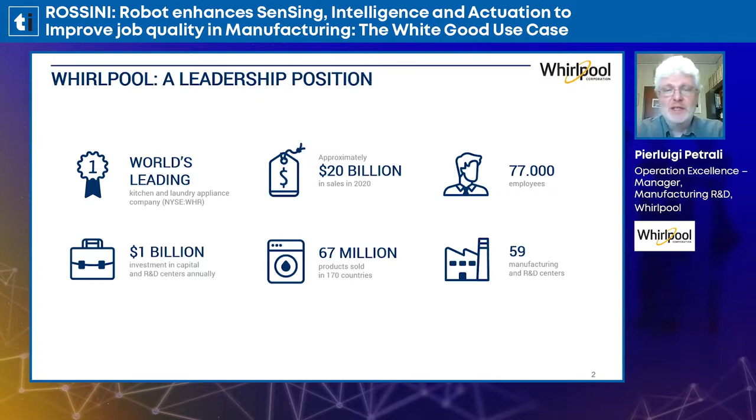I hope everybody knows Whirlpool. Whirlpool is the leader in the world on white good appliances. We're employing more than 77,000 employees around the world, and last year we made total revenues of approximately 20 billion. We are present in almost all the continents. We have also a strong presence in Europe, where we have our European, Middle East, and Africa headquarters based in Italy. We have production facilities in Italy, a lot of them, in Poland, strong presence there, in Slovakia, in England, in Russia, and in Turkey.

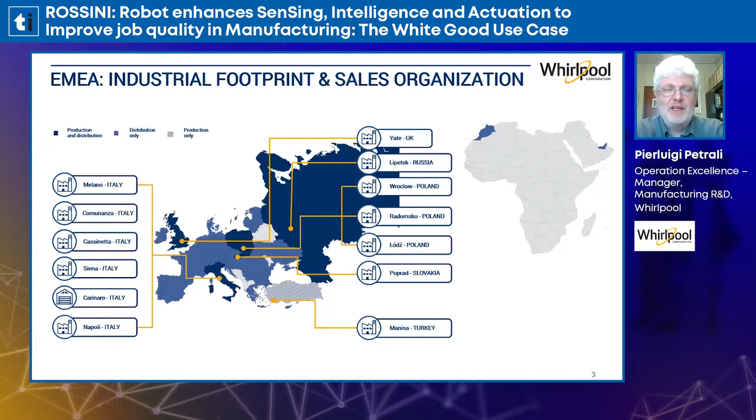What we are doing here in Europe is not much different from what we are doing all around the world. We are producing and selling products for the kitchen, so ovens, refrigerators, cooktops, dishwashers, and also products for the laundry, so washing machines and clothes dryers.

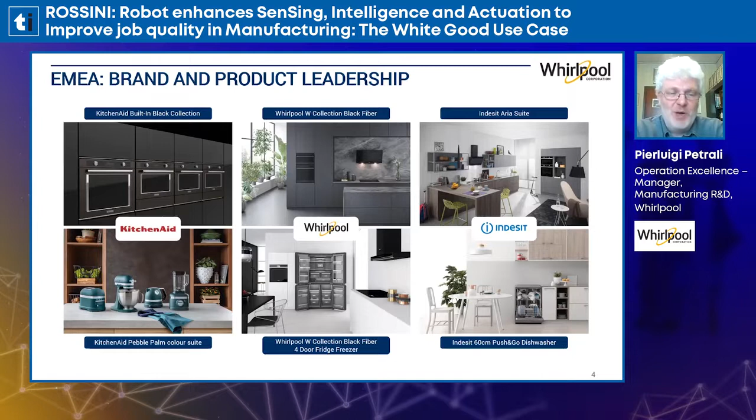Here we can see three of our most important brands in the Europe region. So Whirlpool is very well known. Indesit is the one that we inherited when we merged with the Merloni group some years ago. And there's also maybe something that is not so known by the larger population, which is KitchenAid. So those fancy stand mixers and other small appliances are also part of the big Whirlpool family.

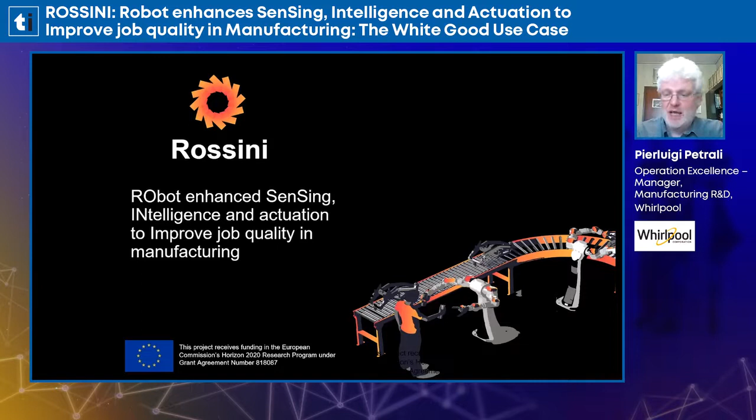Okay, let's move on to the main subject of our presentation, which is Rossini. Rossini is a project funded under Horizon 2020, which is the European most important program for research and innovation.

To test a novel approach to robotics. The main goal of Rossini is actually to develop a very innovative way to design and develop robotic cooperation. So our idea is to make sure that the future cooperating robot will be inherently safe, providing both software and a hardware platform, with the final goal to have a system able to spread human-robotic cooperation applications.

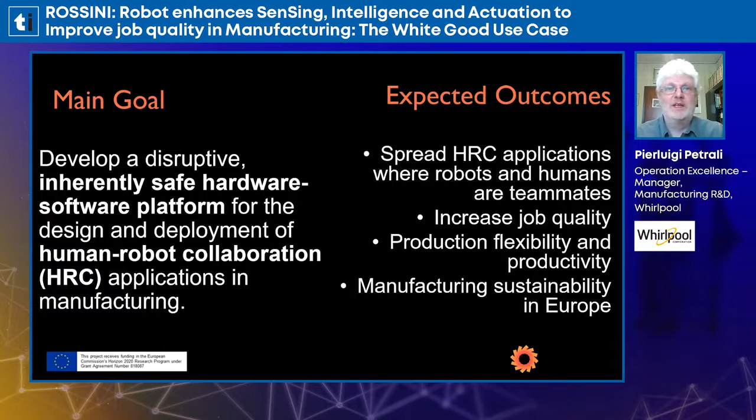Of course, to do what? To increase job quality, so to improve somehow the condition of work of a worker, and also to allow more flexibility in production schedule and production management. And that's, of course, also helping the way in which Europe is going to evolve its approach toward future manufacturing.

The main goal for Rossini will be achieved through the development of a single platform, I'd say. A single platform which brings together different layers, what we call layers. So there are many layers that we can put together in order to achieve the goals of human-robotic cooperation. We have to take into account the sensing, the perception, the cognition, the control, the actuation, and of course the human factors, integrating them all in one platform.

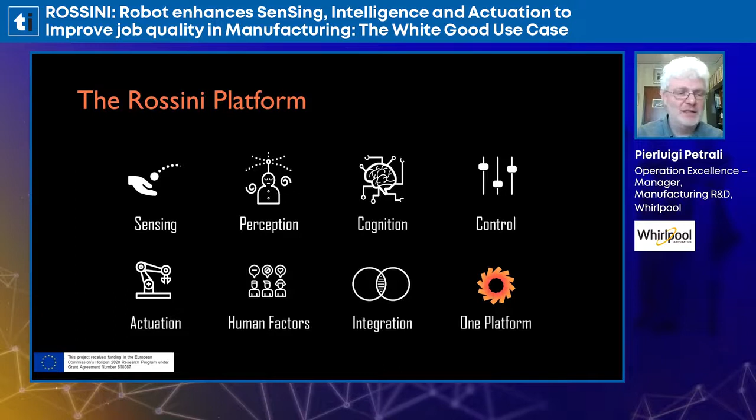Let's see what sensing, perception, and cognition mean. Why sensing? Sensing is, of course, the act of gathering some information, or better, some data from the field. So in our project, the goal is to improve the detection capabilities of those systems, to improve the track capabilities, and to monitor the working environment, with special attention to the safety-related issues.

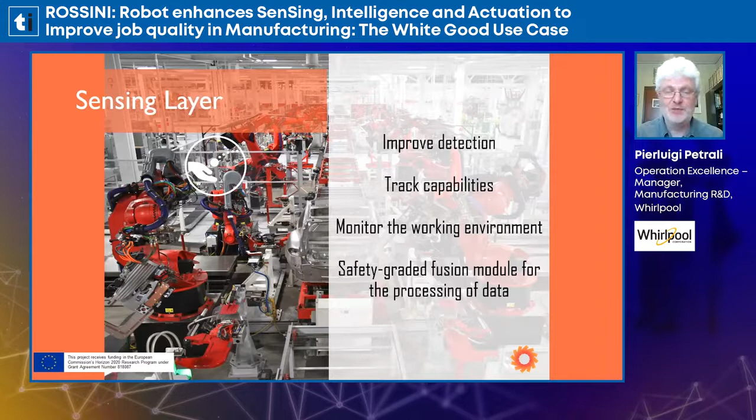Data alone don't do anything. We need to transform this data into information. So the idea is to fuse all this data into a perception layer, which is able to transform the raw data we have into what we call the semantic scene map. So the idea is to understand what we are actually immersed in.

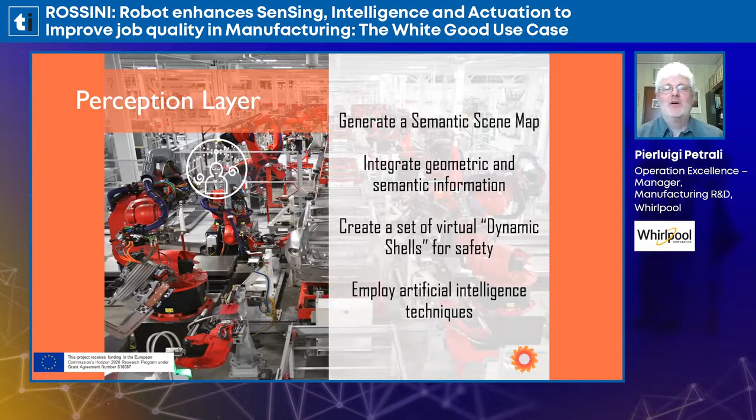So the idea is to make sure that the robot is able to understand which environment it is immersed into, in terms of space, in terms of people, in terms of products, and all the other things that are there. Of course, that's not enough.

Once we have the information, we need to generate some knowledge behind it. So the idea is to fuse together all this information gathered from the sensors to make sure that we have a basic platform of available information to, for example, generate scheduling, plan activities, and update the working environment through this availability of the semantic scene map.

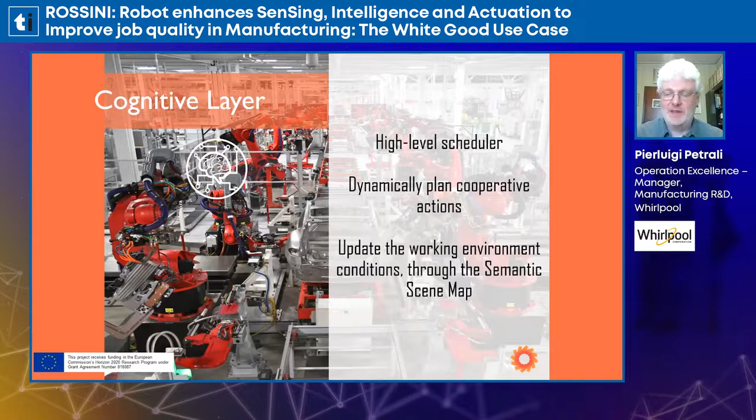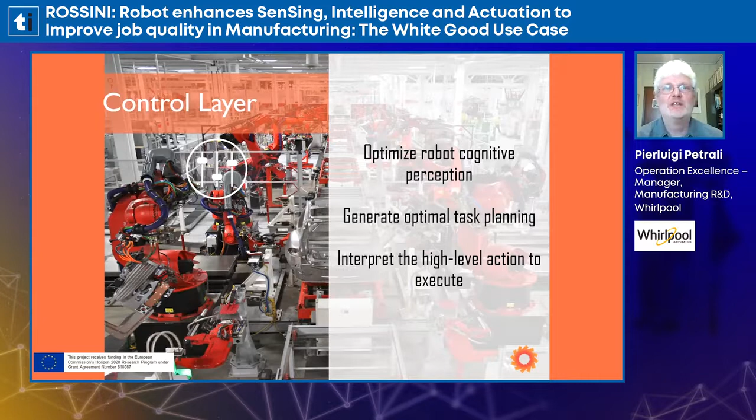Once we have the cognition available, we are able to make the control, so to plan task planning, to plan actions, and to plan the way in which the robot has to move in this new enriched environment. And of course, once we have the capability to generate an action, we need to put it into place, and so we get the actuation layer.

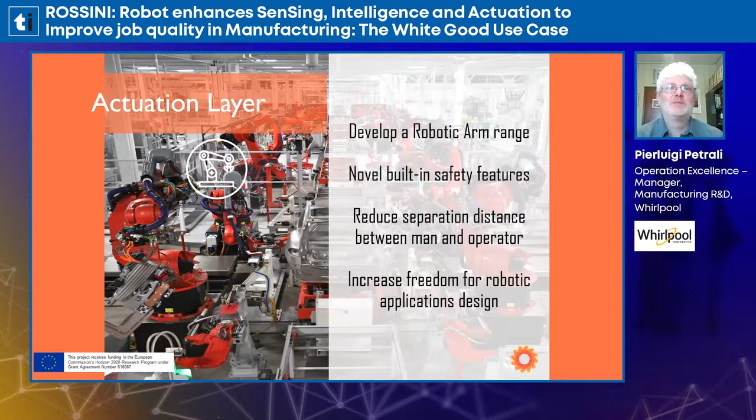Rossini is going to develop a robotic arm with new safety features, to reduce separation distance and also to improve the way in which human and robot can work together, share the same area, share the same space, and share the same actions.

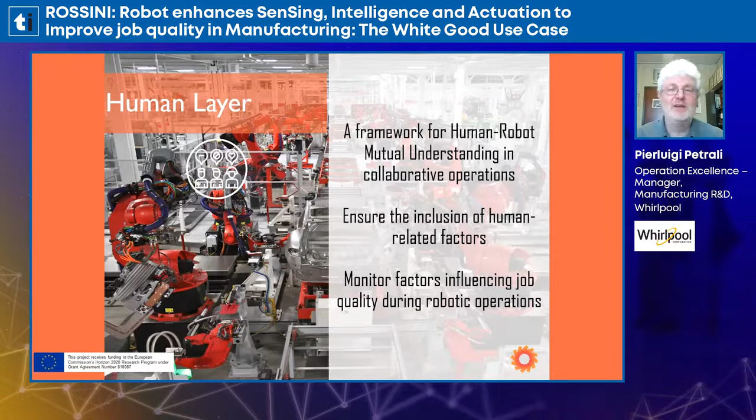The human layer is very important in this approach. Why? Because, of course, the main hurdle we have for making robots work with humans is to let robots be safe, able to understand, able to cooperate. So it's very important that all the human factors are understood and taken into our platform.

We need to fuse all these things together because we can have a lot of sensing, a lot of software, a lot of different parts, but the point is that we need to put it together so that we're able to generate one single platform to put all these things together and allow for efficient and effective robot and human integration.

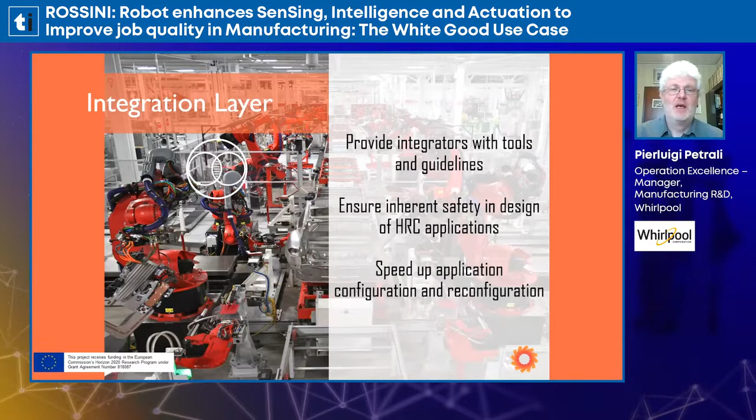Of course, there are some challenges to reach that. First is safety. Safety is the most important part. We need to make sure that the human is not going to be harmed by working with robots. And that's very hard to be done when we are talking about robots which are moving or working with heavy payload. One thing is for a robot to move one screw or very light objects. Another one is cooperating with a robot which is moving very heavy load, like we will see in our use case, a counterweight for a washing machine.

Also, the second big challenge is that it's not the robot itself that has to be safe, it's the whole application. An example I usually tell at conferences is that I can have the safest robot in the world, but if I place a katana or another kind of sword in its end effectors, it's very difficult to provide overall safety. So it's very important that we address this aspect in a system-wide way.

The third challenge is to make sure that the workforce, the people, is going to accept working close to a robot and sharing space, sharing action with it. So this is also something we need to work a lot on, to make sure that all the technical achievements we are doing will be accepted by the human being.

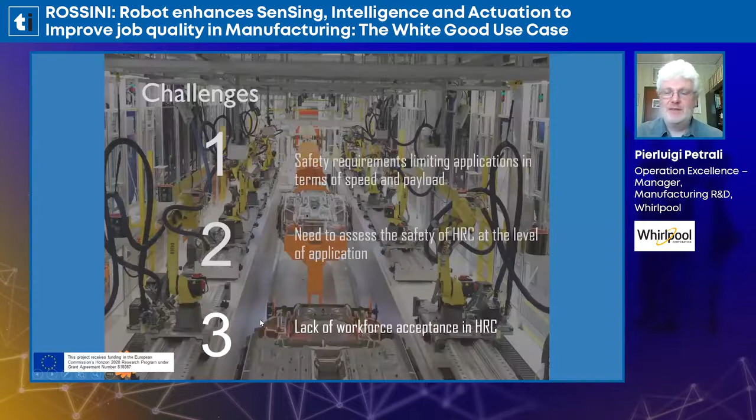So we are asking a lot of the worker. And you can imagine doing that 8 hours a day within a cycle time, which is more or less 22 to 30 seconds for each piece, depending on the production line.

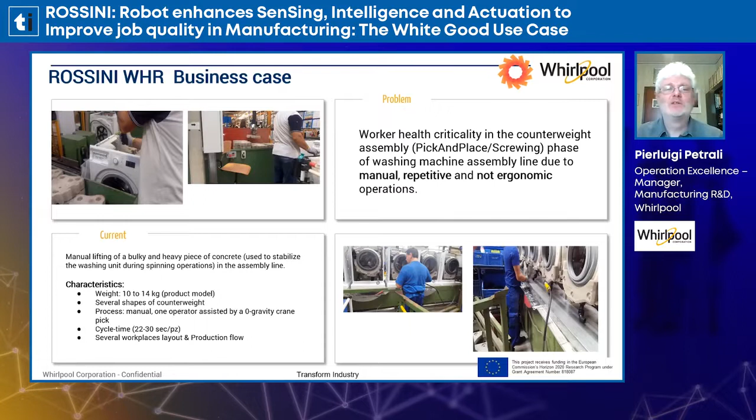So we want to implement a robotic cell in this workstation. How to do that? The innovative solution is to make sure that we have a robot that can share the same area, so can work together with the worker, and let all the non-ergonomic operations, like taking the counterweight and placing it close to the machine, be done by the robot.

This sounds simple, but it's not that simple to be done, especially because in order to load a heavy weight, we also need to work with a heavyweight robot. So it's not a collaborative robot by default, it's not easy to make this collaborative.

Which are the objectives that we have? Of course, improving safety and ergonomic aspects. This is the main goal for having cooperative robots in our factories. It's not always about the economic point of view. The real objective is to make sure that our workers can work in a safe condition and without any risk to their health. So the idea is to achieve this kind of new working cell.

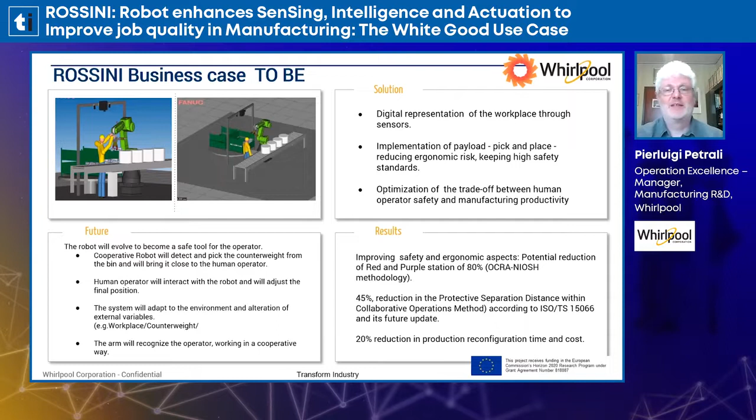This project started a couple of years ago, and now we are very close to its realization. What we did is, of course, use a lot of 3D models and advanced simulation to put together the novel work cell.

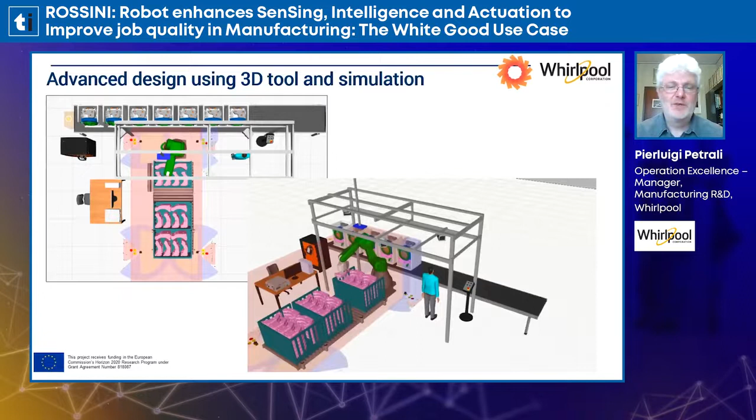Here you can see an animation of it. Take into account that we have to work within a continuous production cell, so it's another factor of difficulty. The robot has to synchronize with a moving assembly line and share the same spaces with the worker.

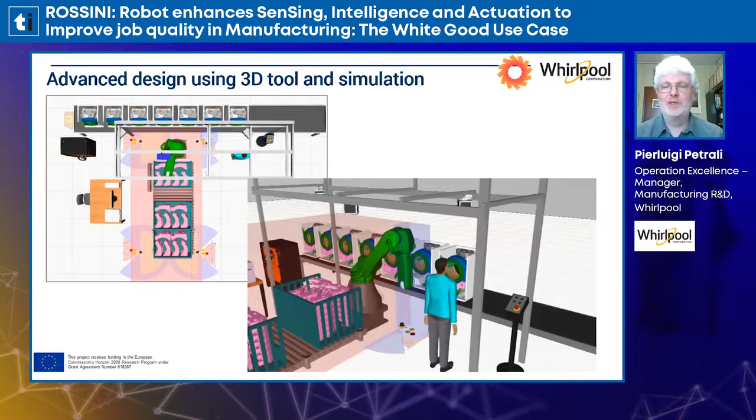The idea is that, okay, now you cannot see the worker moving, but in the real situation, the worker will be addressing the washing machine to do other operations like cabling, screwing, and so on. How to do that? Of course, you can see just a robot moving here. Behind that, there are some novelty things.

So all this cell is integrated with some very advanced mechanism to control. A lot of cameras are getting the scene and translating it into semantic paths. So the core of the system is this ROS semantic layer controller, which is based on a vision system that is constantly keeping the imaging from the environment and the worker and using it to communicate with the robot.

So the robot behavior is controlled by this continuous information about the scenes. Also, we need to make sure that all the cell is synchronized with the production, and this is the way in which we need to do that.

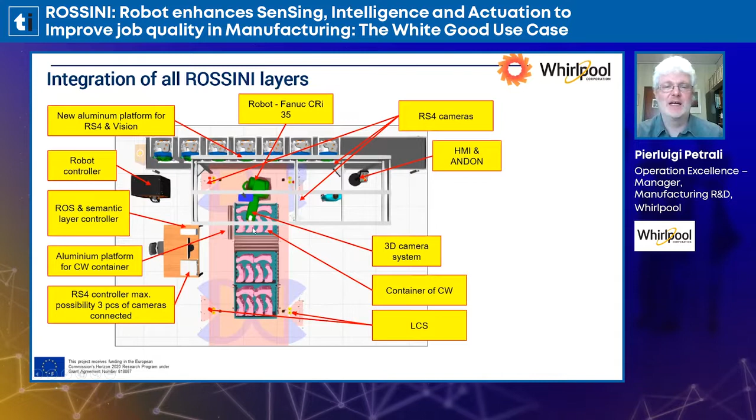So all the system is synchronized with the actual production. And also the system has to be synchronized with the part entering. So it's very important that there is also a vision system able to recognize the counterweight. Safety is the basic thing, and I think this is the real novelty.

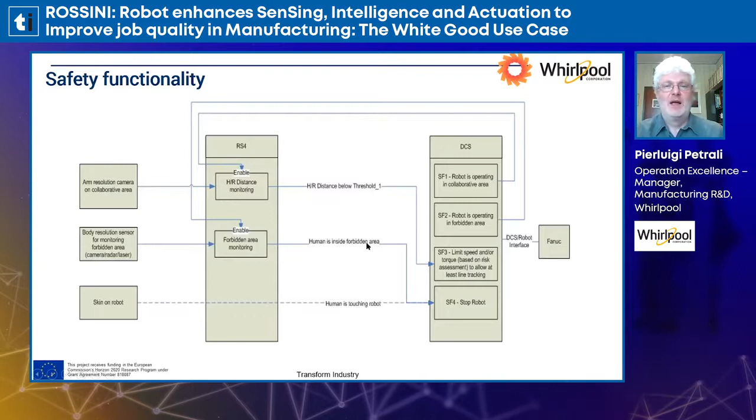So the robot is actually working, taking into account what is happening to the people, to the body, what is happening to itself, and what is happening in the environment. We are trying to put it together, as I said, a lot of cameras, a lot of sensors, and that's not an easy job.

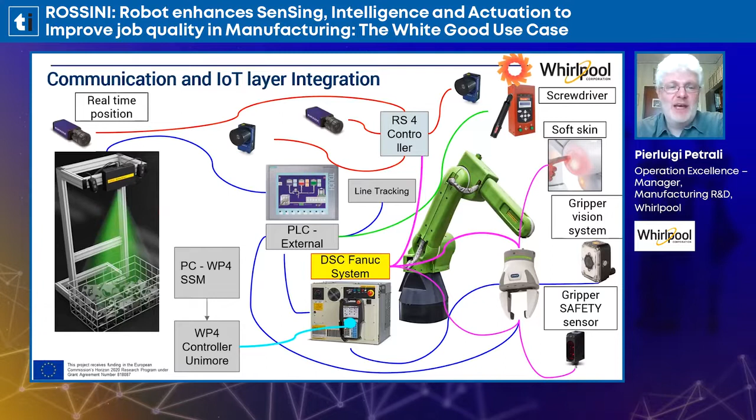It's not enough, because as I said before, the application has to be safe up to the application layer, up to the end effector. So besides that, we also had to design a specific gripper that has to be collaborative by itself. We put together a novel design, we built it, and we are going to equip this gripper with a further camera sensor able to see the parts and the environment, and also this new soft skin concept.

So the idea is to keep the gripper with a soft skin, as for the human, able to sense touching, and so to react quickly when the system, in this case the gripper, is going to touch the operator.

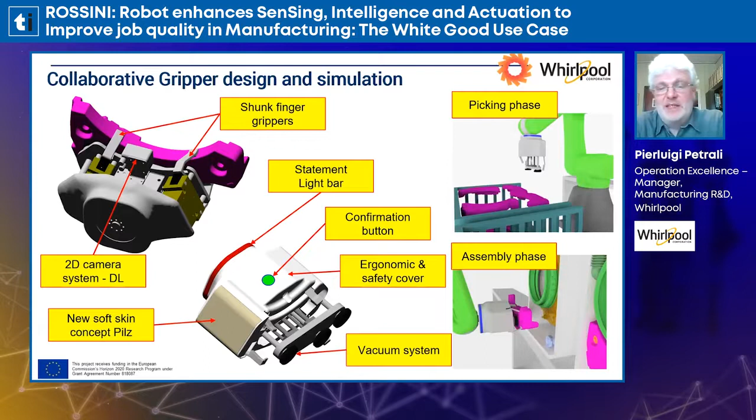So, conclusion. The real challenge for the future is to make sure that any robotic application will be cooperative, no matter the size of the robot, no matter its velocity, no matter that. The real challenge is to make every robot in the future able to cooperate with humans.

This could be achieved by this integration of sensors, artificial intelligence, and also actuators. The other interesting conclusion we are having within Rossini is that we are designing everything using 3D models and simulation. So there will be no physical prototype realized unless we are completely satisfied with the digital design, which of course helps us reduce a lot the money used to make physical prototypes, and also the time.

The third important lesson is that end effectors are very important. So it's not enough that we are able to design a robotic arm which is cooperative, but also the end effector. While we have a lot of robotic arms able to be cooperative, it's not the same for end effectors. Very often end effectors have to be designed for custom needs, because parts are different and so on.